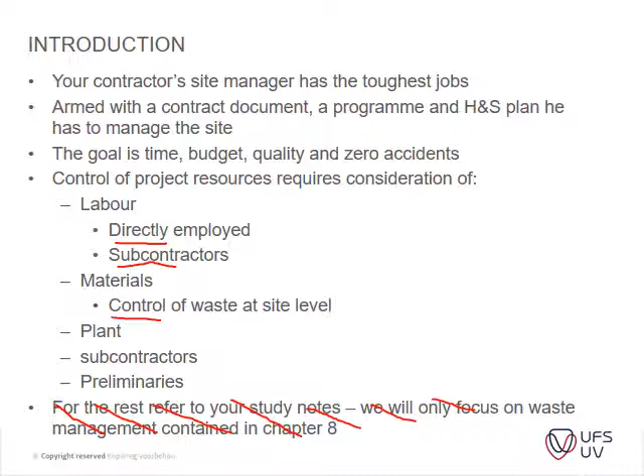So this is this little thing which I said crept in. So please just ignore that. Yesterday when I updated the notes, I saw that this was in. So that's just something that crept in.

Okay, so labor control. Like I said, you can either have directly employed labor or you can have self-employed labor. In South Africa, it's not really self-employed labor. I think we've got a different term. We usually use labor-only contractors, guys that specialize in labor, which have the necessary insurance, they have their medicals updated,

UIF and all those items they look at, because you can imagine if you've got one or two projects and you suddenly have 100 people that you need to appoint, and then what do you do with them once the project is done? So that's where the labor-only comes in. But your directly employed labor is usually the contractors like shop fitters and so on. They have specialized guys that do the work for them.

For instance, at that tender briefing that we went to, tilers, plasterers, many of the contractors will have that type of core staff on their list, the artisans, and bricklayers or so. And what they might do is get a couple of casuals for that specific project to assist those artisans, guys that carry the bricks up to them. And then it depends on the size of the contractor as well, and the location.

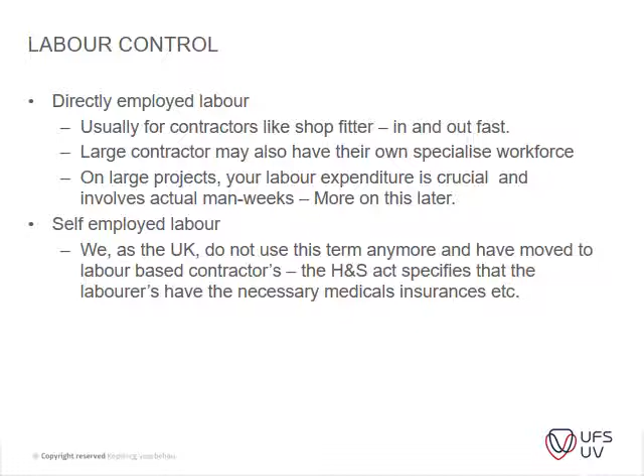Okay, then self-employed labor: in the book, the UK does not use the term anymore and has moved to labor-based contractors, like I said earlier. Okay, so resource histograms. This you did in PPM, so I'm not going to go into too much depth of how your labor histograms work.

But what I may ask you guys to do, there's an example in this book that I might post as a mini task for you guys to do. But don't worry, I won't do it now. I'll just check with you guys when you have a bit of time. When are your last tasks and tests due?

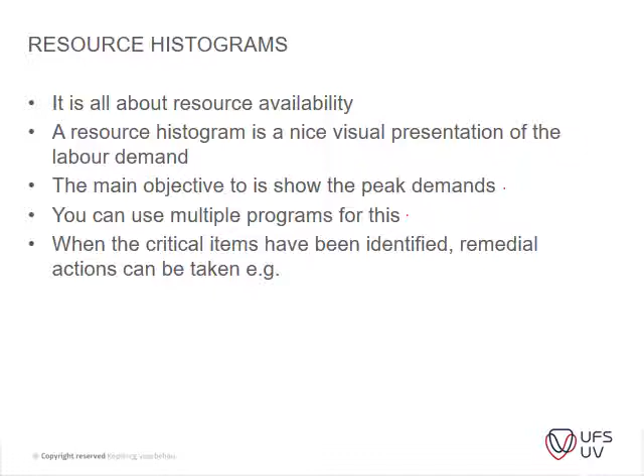Okay, when the critical items have been identified, remedial actions have to be taken, e.g. appointing more people, getting more machinery, or just letting the project run for longer. So that type of options that you do have.

Okay, so this one you'll probably recognize. This is from PPM from third year. I don't know if it looks familiar. It's a very simple histogram. So it's a simple project where you have excavations, bedding, lay pipes, manhole excavations, manhole construction, install valves, backfill, test and commissioning. So it's a very simple little project.

But this is now your labor only histogram. Okay, so you need 2 laborers in your teams that you can put on for trench excavation. So you've got 2 people that can work simultaneously in the trench. Your bedding, you can put in 4 people to work on that, and it takes them about 1 day.

And then you've got your manhole excavations. You need about this amount of people. Laying of pipes, you need 3 people to do that. And then you've got your manhole construction where you need 6 people, and so forth. Okay, so this is done on an Excel spreadsheet, and then you just add up the amount of people that you need per day.

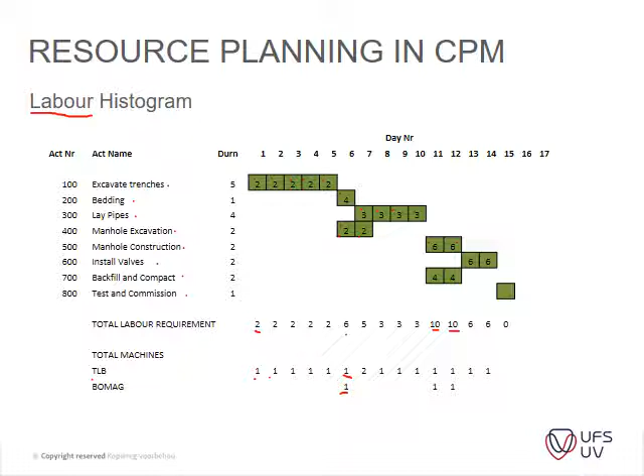Okay, so on your labor histogram you can see we've got these 2 extremities here, but we know we only have 8 laborers available, so there's already too many laborers on that day, so you can see you need to do a resource leveling there.

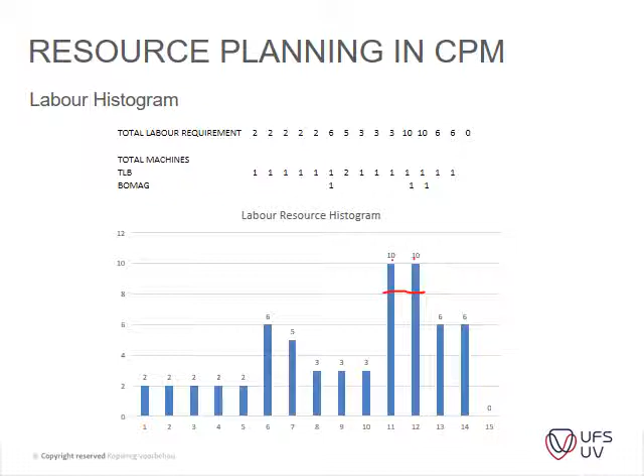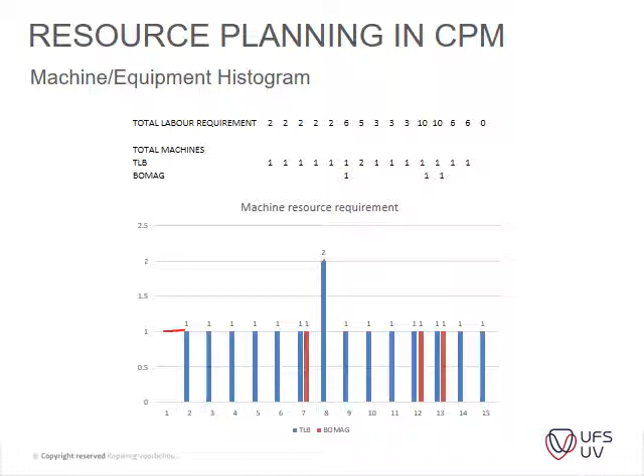Okay, then with regard to the TLB, the same applies. You add it up, and you can see on which days you need what amount of machinery, and you can see on day 8 you actually need 2 TLBs, but you only have 1 available. Okay, so you can easily identify where you don't have enough resources.

Okay, and then the simple solution, without going into too much depth, is you just level out your resources and your TLBs. I think it's the pipe laying that just moves out one day, together with your excavations, which moves the project by 1 day if you level it to 1, and if you level your laborers to 8, like there.

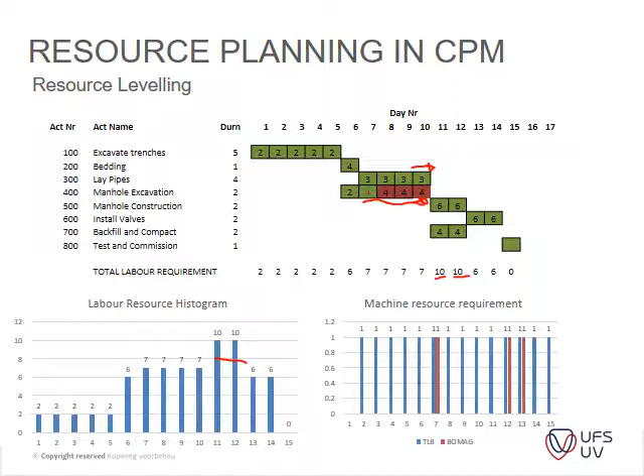I just want to see why it's still adding that up. Okay, so yeah, that's just a bit of a recap of how histograms work.

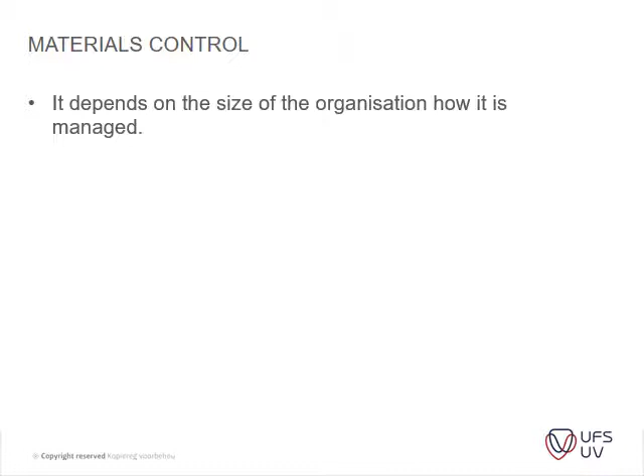And going further in materials control, that is on page 401. It depends on the size of the organization how materials are managed, whether you've got a buyer, central buying division, or if one person does everything. Good communications are needed between buyers and site personnel. That's very crucial.

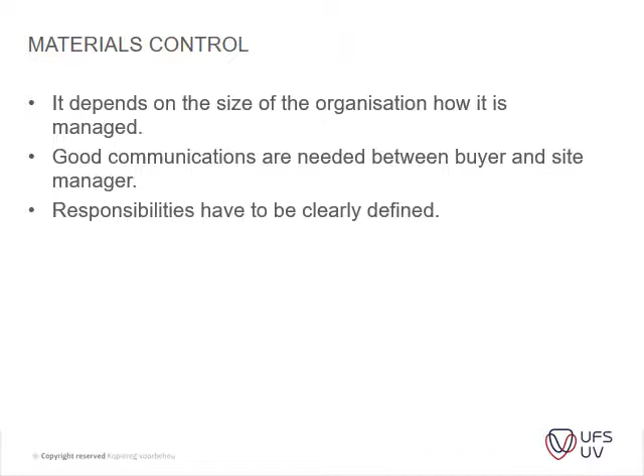And then the responsibilities have to be clearly defined. Once on site, it's the responsibility of the construction manager to coordinate the communication. So that's something important to note.

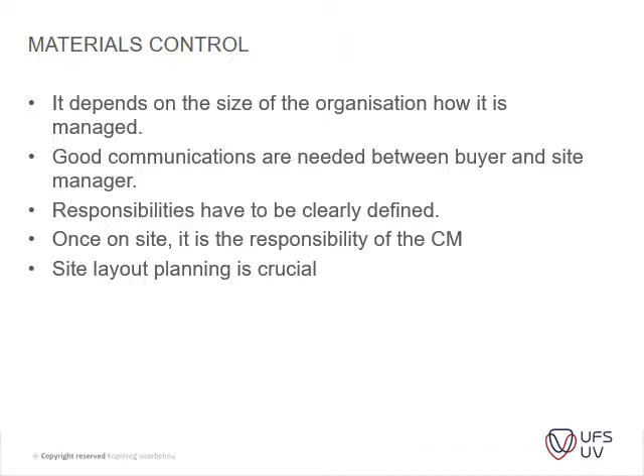And then site layout planning is crucial. That's where you're going to put your plant, where you're going to store your materials. And I think it's one of my next slides. There's a couple of things that you can immediately see if your housekeeping on site is done well. If you come onto a site and everything is nice and neat, you know they're managing their materials well. If you come onto site and you're falling over debris and bricks, broken bricks and so on, you know that they're not managing their materials very well.

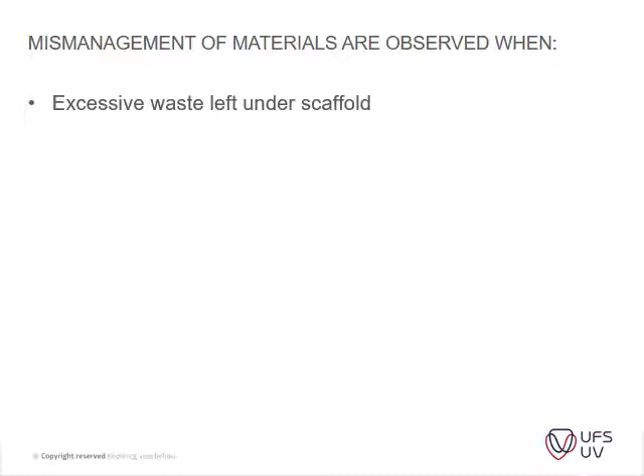Okay, excessive waste left under scaffolding. Here's actually the items which you can see. This is just a few examples. What you can see is excessive waste under scaffold, face brick bulldozed underground, material being stored on uneven ground, pallets of bricks unloaded on unprepared ground. This is supposed to be on.

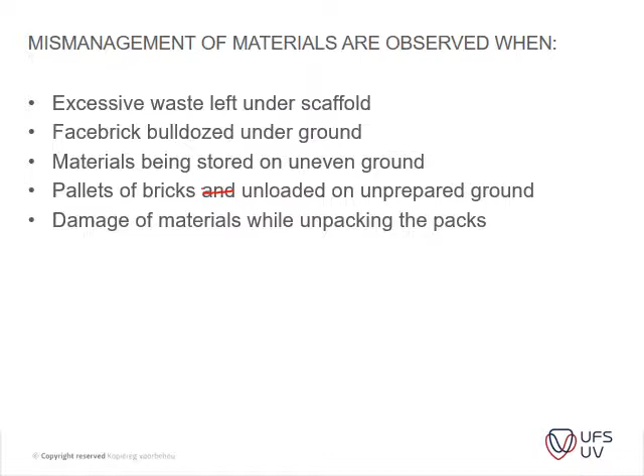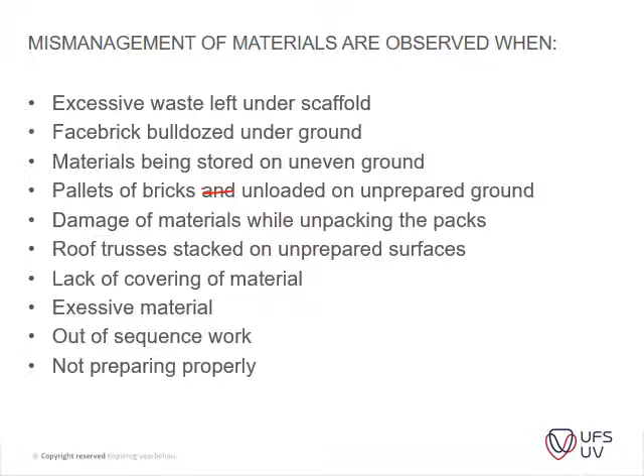Okay, and then damage of materials by unpacking the packs, roof trusses stacked on unprepared surfaces, lack of covering of material, excessive material, out of sequence work, not preparing properly. So you can easily see when a site is not properly run, especially towards managing of materials.

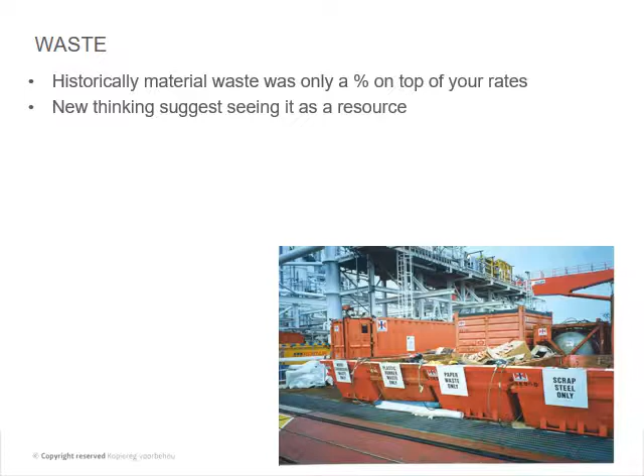Then something which builds on that is waste. Historically material waste was only a percentage on top of your rates, but these days, if you're working on large projects, that percentage can be a lot of money in your pocket or a lot of money lost. So it is something that you need to manage very well. New thinking suggests seeing it as a resource. The industry can benefit environmentally, on performance and the bottom line.

Demolitions amount to about 100 million tons per year. That's in the UK, so it's quite a lot. And then waste removal accounts for 4.5% of the company's profit. So just to put it into perspective, 4.5% is quite a lot. If you're working on a million rand worth of project, that's more or less 45,000 rand, which you could have saved or put into your pocket. So yeah, it's a lot of money.

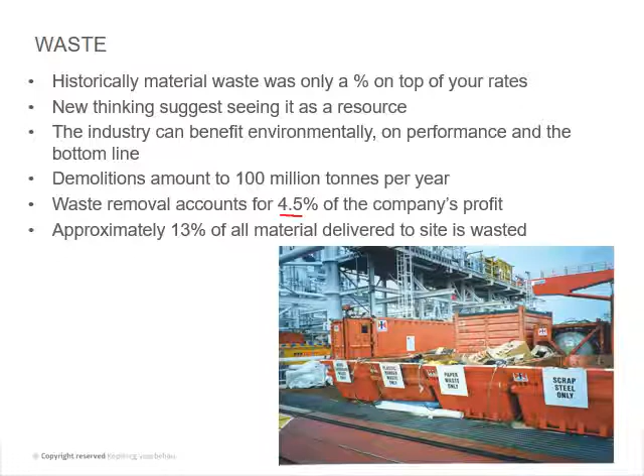Then approximately 13% of all material delivered to site is wasted. That's quite a staggering amount. And that's just the waste of material. There's other items which you can manage well as well, like your site offices. If you manage your tools and sheds and so on efficiently, the fewer containers you have on site, the less your overheads per day. So that's the stuff that you can think about.

The other thing is if you plan your site such that you use some of your constructed building as storage, you can save that cost as well. So there's a whole lot of practical items that you can think of to save money by utilizing your progress on site and just being effective.

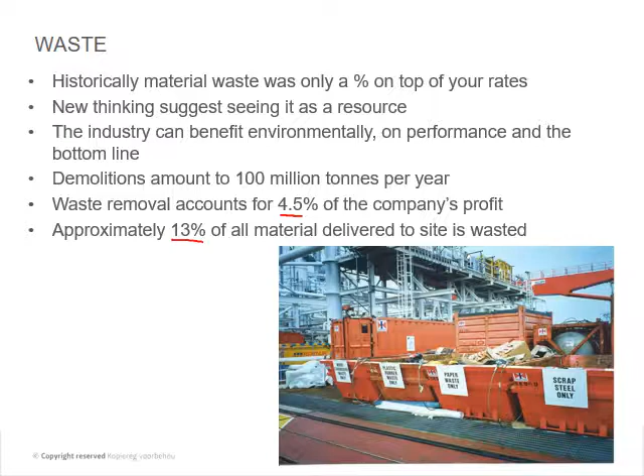Okay, duty of care: construction and demolition waste streams have been prioritized by the Environmental Agency. So basically once you've demolished something, you need to get it off site. You need to plan for it. That's the short and long of it. You can't just demolish something and not have a plan of how to clean your site. Waste streams should be managed safely and without risk to human health.

And then the waste may consist of metals, asphalt, tar, concrete, brick, tiles, etc. And there's actually money to be made out of some of these demolitions. Sometimes you can sell some of your demolition rubble for fill in other areas. If you've got a contractor that has a lot of fill to do and you can use that demolition material there, then you can actually sell it to them. So remember that. Don't just pay money and go and dump it at the nearest site. You can actually save or make money from that.

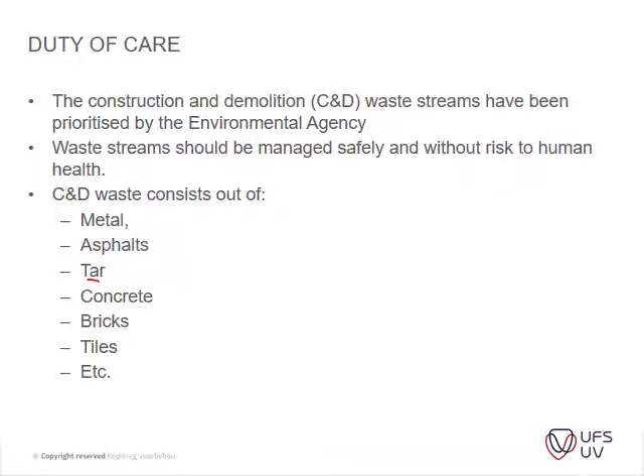Like for instance, your tar waste you can reuse for other applications also. I know in Kuruman they use tar sections because of the asbestos there on some of the gravel roads. They just use some of the excess bitumen and made a little layer on some of those areas to rehabilitate them, so that the dust doesn't fly up. So that was one of the ways you can use that, for instance.

Duty of care: construction and demolition waste is normally classified as commercial or industrial waste. Hazardous waste, which requires pre-consignment, includes things like asbestos, chemicals, oils, contaminated soils, and so on.

I've worked on one project where we had to remove asbestos. It's a schlep - there are only about 4 contractors in the country that do it, so it's highly specialized work, and they usually charge a lot of money for it. So as soon as you're pricing a project and you see there's asbestos, immediately start asking questions: is there enough money allowed for it? Identify it as a risk when pricing your documents.

Then we have a legal duty of care. If we know we're going to work with asbestos, the other risk is exposing your laborers to that. It might not be that your personnel picks up a strand of asbestos on that specific site, but 5 years down the line he gets asbestosis, and he says, oh, on this project I worked on, that's probably where I got it - even though he might have got it from somewhere else. So just see it in that light.

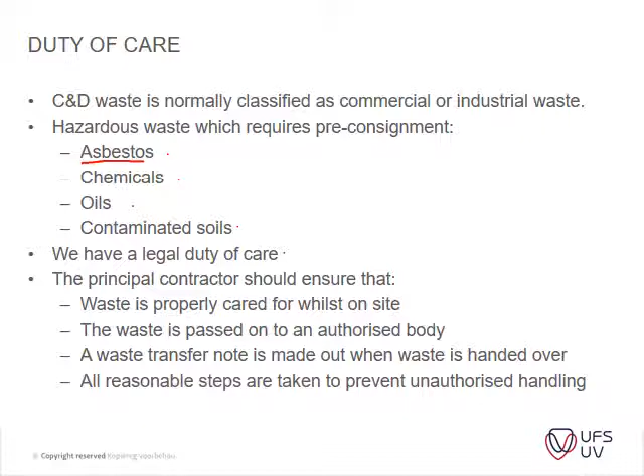The principal contractor should ensure that waste is properly cared for whilst on site. Waste is passed on to an authorized body. A waste transfer note is made out when waste is handed over. All reasonable steps are taken to prevent unauthorized handling.

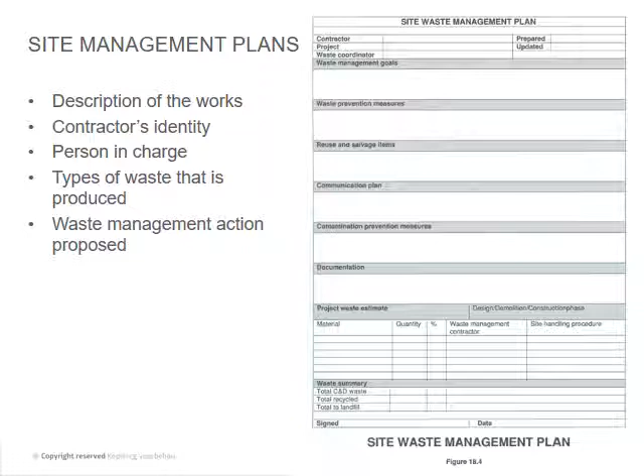Site management plan - here's a nice example you guys can use. It includes description of the works, contractor's identity, person in charge, type of waste produced, and waste management action proposed. Pretty straightforward, you guys can have a look at it.

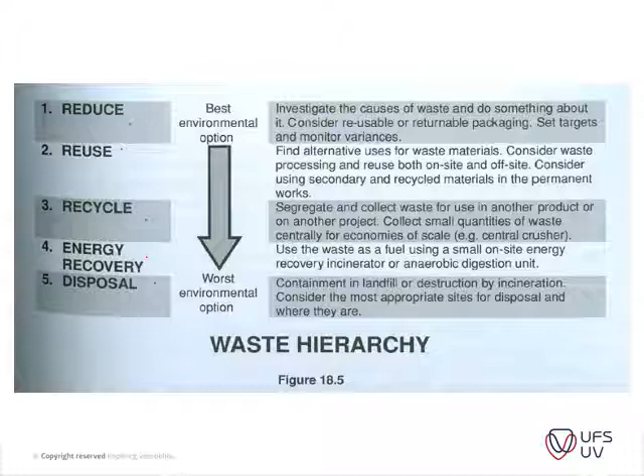A waste hierarchy - so you guys can look at how waste can either be reduced, reused, recycled, energy recovered, or disposed of. That's also a nice little question to ask on waste, and obviously you need to explain what each one is.

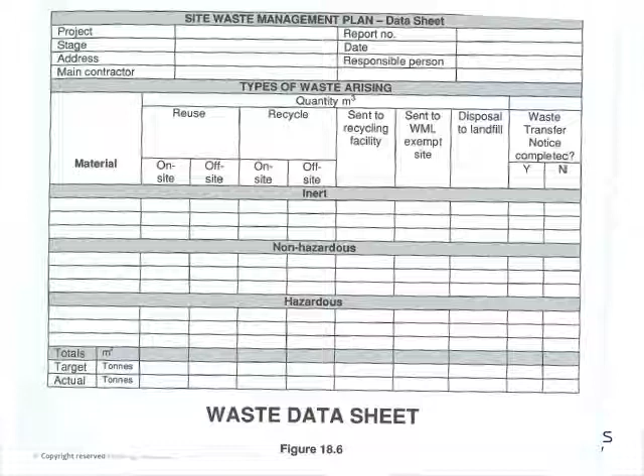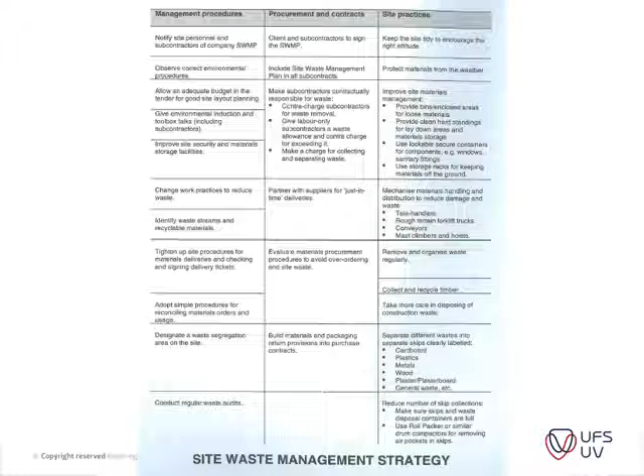Then, improving your management of waste. Managers have to be proactive in planning and managing materials ordering, delivery, handling, and storage. Waste is caused by design waste, takeoff specification waste, delivery waste, and site waste. Waste management should be integrated into everyday thinking - it will have a positive impact on the contractor's profit margin. Materials have to be managed properly, incentives for managers have to be put in place, along with company materials management policies, etc. It will prevent health and safety problems as well.

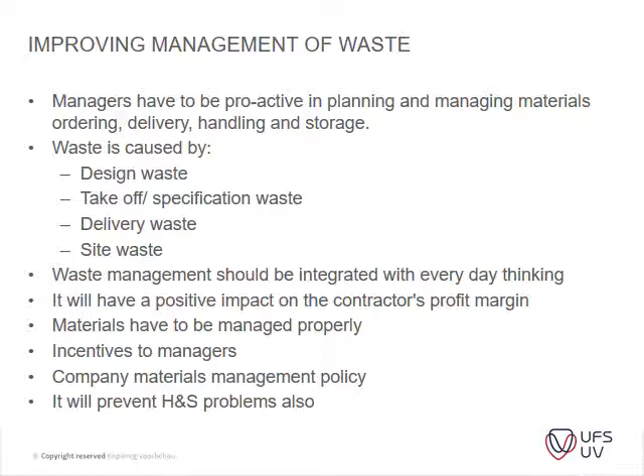Then we get to subcontractors - and this is now very important for me. You've got subcontractors, pre-tender planning, and then during-construction contract planning. Figure 18.8 is important - it shows the relationship between your planning and your actual control on site.

So firstly, if you think back to our tender briefing last week Friday, those guys will have to obtain quotes now from their suppliers - so they're at this stage, and then they need to compile the shortlist, subcontractors register, subcontractor selection criteria, and obtain quotations. If it's a large company, usually those guys have to be on their vendor lists. So if it's something specialized, they've got a whole lot of red tape to actually get quotes from other suppliers and get them onto their registers.

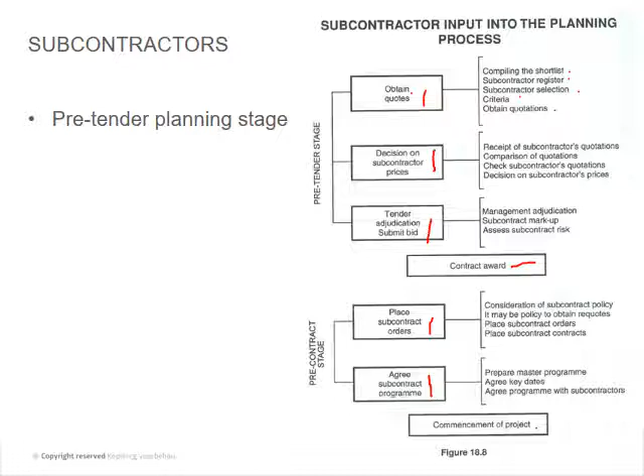So instead of submitting tenders, if it's a large tender, the main contractor will have tenders going out to their subcontractors. But if it's a smaller or medium-sized contract, they get quotes for certain things to do. Yeah, it's like a selective process - the contractor selects their own contractor.

Okay, so this is also very important, the information contained in here. You will see in your books there's a whole lot of checklists. Those checklists, just read through that. But the most important items are actually contained in these figures.

So again, going back to my rule of thumb: know the headings, and then you can just hold on to that. In Afrikaans, ken jy opskrifte, gorrel die res. But the main thing is, if you need to gorrel, you need to understand.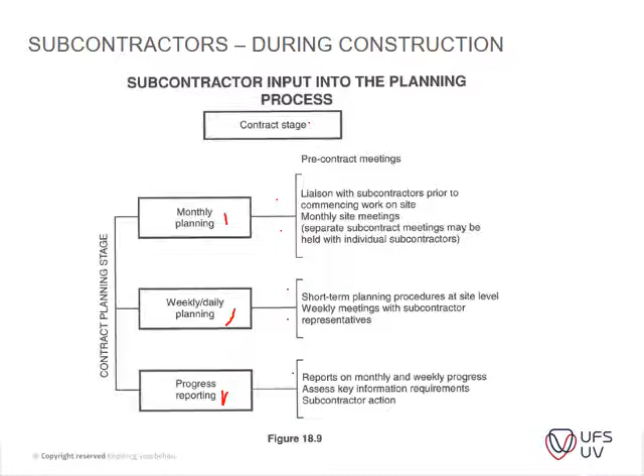Subcontractors continued. These days, subcontractors may be responsible for their own program, and they are. For instance, Amelia, where we worked on, the plumbing contractors had to submit their own program, and that had to slot in underneath the main contractor's program.

Then it's a good idea to keep track of the price, quality, and workmanship standards, and incorporate the time program performance of subcontractors. I know I've seen guys, if they've got vendors and subcontractors, they actually have a scorecard on them and a rating, so the guys can move up and down, and that's usually very confidential information.

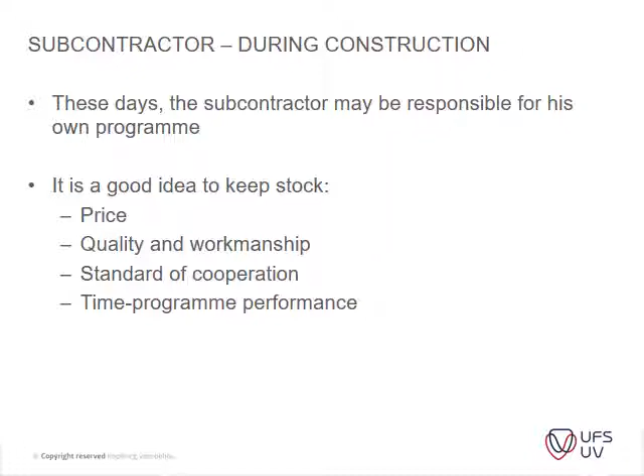It does, in large companies that's very crucial information, because if you're working on large projects and have to evaluate a lot of subcontractors, then you look at their ratings for this guy in this area and so on. So it does become quite complex.

Okay, and then just an example - this is, I think we've touched on this. This is not that important for me, but work package master program, package stage program, and then you've got a work package 4/6 week program. So it's just going into more detail. It's not too important for me.

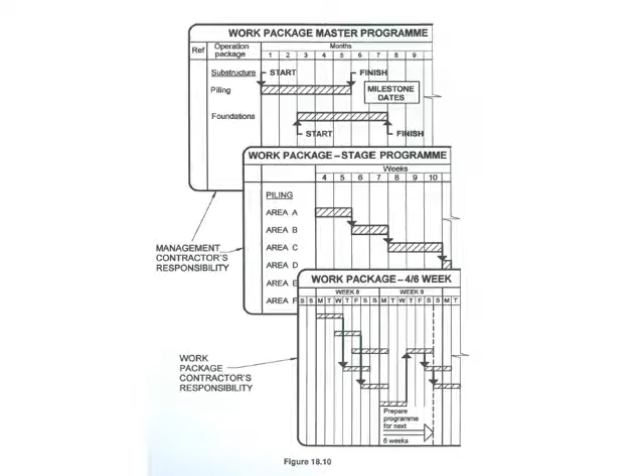Okay, then subcontractors liaison meetings. So you've got your program: monthly progress meetings, 2-weekly short-term planning meetings, 1-weekly meeting, and then daily planning. Your monthly site meetings coincide with main contractor meetings with the architect, purpose being to review progress, overview variations, basically reporting to management. Then your 2-weekly meetings are more on technical items, short-term planning implementation on a 1 or 2 week cycle. The purpose is to resource the short-term period, review and monitor progress, liaise with other trades, and progress reporting at weekly intervals, etc.

What's liaison in Afrikaans? Correspondentie. What does it mean, what's in there? Liaison, yeah, it's basically working together. If you liaise with someone, you speak to them, you communicate, and you do stuff together.

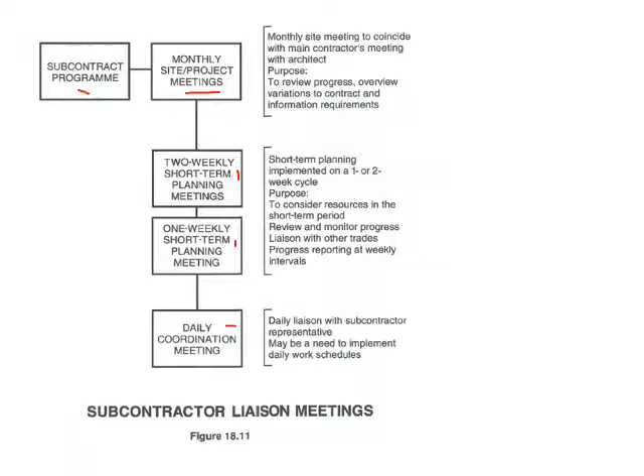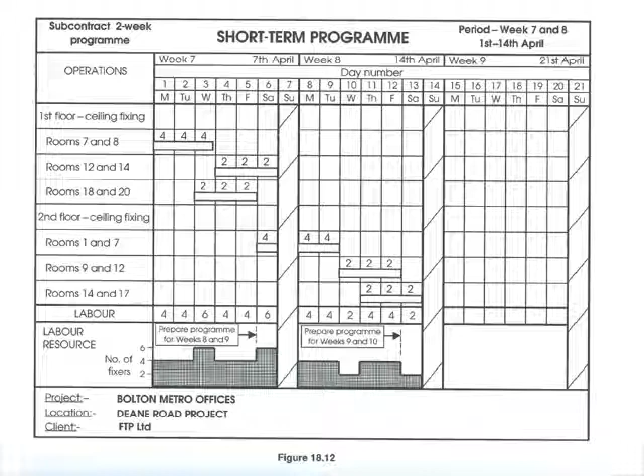Okay, then the last one is the short-term program, just another example of that. That's also not too important - we're going to do programming later on. Next semester we're going to do programming in detail, so then we're going to cover all these areas. And that's it. Thank you.